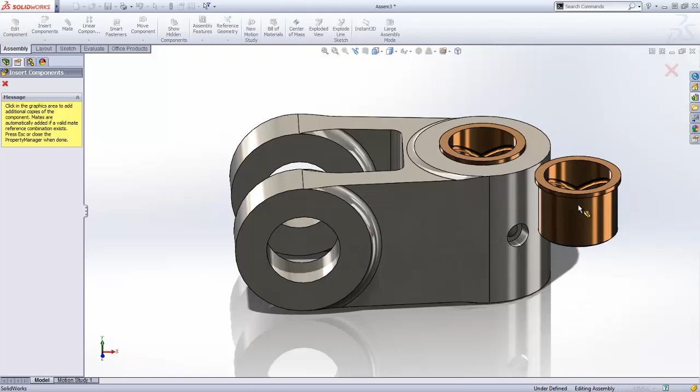We'll start by leveraging our design library to select a flange bushing and drag and drop it into this assembly. As it's dragged over the hole, it automatically seats itself in the hole through the use of smart mates, and we'll add another bushing at the bottom as well.

Notice that there's a star on these bushings. This indicates that this is a smart component and contains smart features. Clicking the star inserts these smart features, as you can tell by the dimensions displayed on the screen.

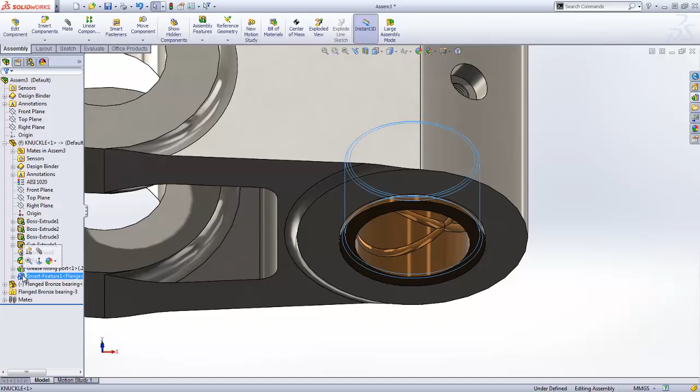If we take a closer look, we can see that these features were actually added to the knuckle part to which it was assembled. We can dig deeper by using the section tool and see that the bore, fillet, and chamfer were added to our part. Let's add the smart features for the other bushing, and just like that, we've defined the proper bore for the bushing.

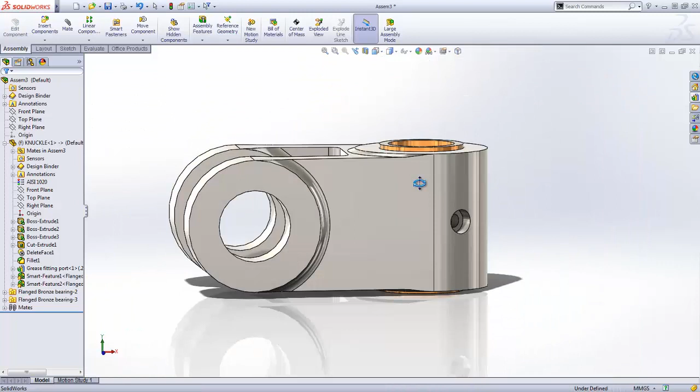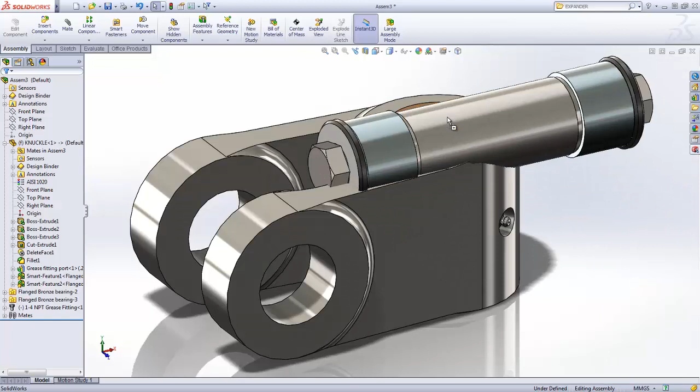Next, we can add the grease fitting by snapping it into position as well. We need to add a pin to our assembly. For models that are not in our design library, we can leverage SolidWorks Search to find items anywhere on your computer. We are presented with all the models with expander in their name or description, and drag and drop the proper model into our assembly.

This expander pin was created in two sizes. For this location, we'll choose the 225mm length pin. SolidWorks automatically places the pin and asks us to verify that we want a concentric mate. The pin is positioned properly in the hole, but we can still move it up and down.

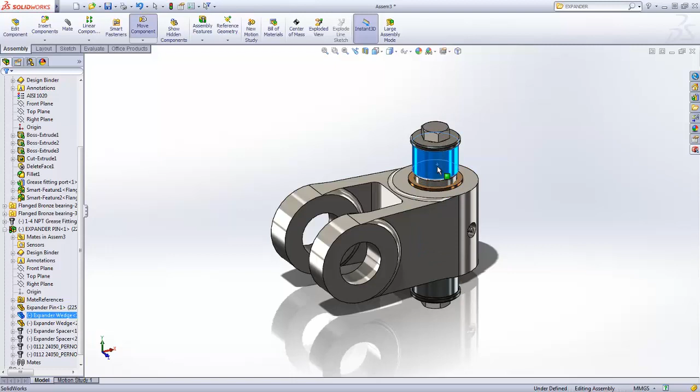Now we could measure this pin and do some math to position it with a distance mate, but a better way is to let SolidWorks do this with the width mate. This advanced mate takes the selected faces and centers them to each other. That was easy, and I didn't even have to get out my calculator.

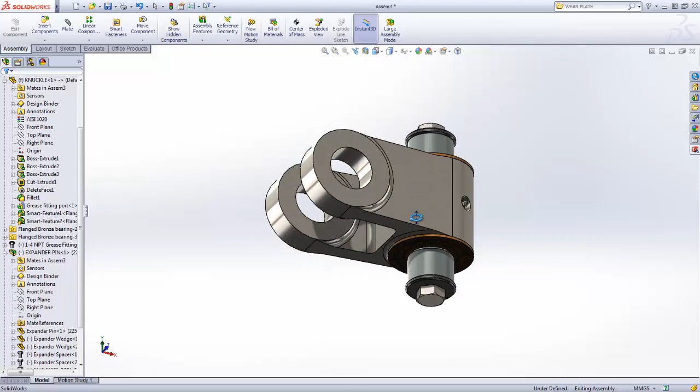Next, we'll leverage SolidWorks Search and place a wear plate at the top of the knuckle. Adding another to the bottom is as easy as holding the control key and dragging and dropping a copy of the wear plate from the top to the bottom. A pin needs to be added to the holes on the left as well, so I'll just drag and drop this one from the feature manager and snap it into position with a concentric mate.

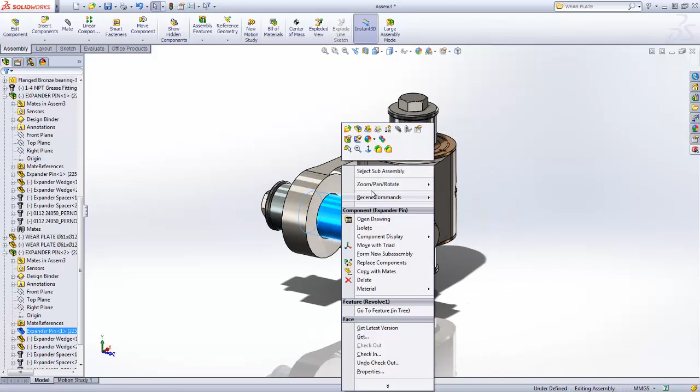Using the width mate again, we can center this one in no time at all. But this pin is too long for this application, so we'll leverage the configuration of the pin assembly and use the 150mm version, and our assembly is complete.

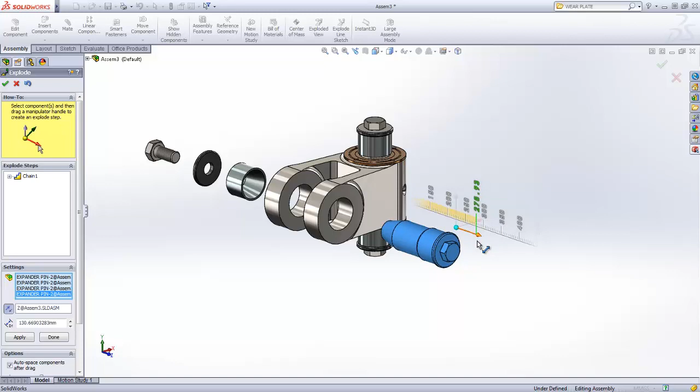Now a great way to communicate how an assembly goes together is with an exploded view, and this is simple with SolidWorks. Let's grab these three components and just drag them out. SolidWorks automatically spaces them, saving me the time of having to do them individually. We'll do the same on the other side, this time selecting the pin as well.

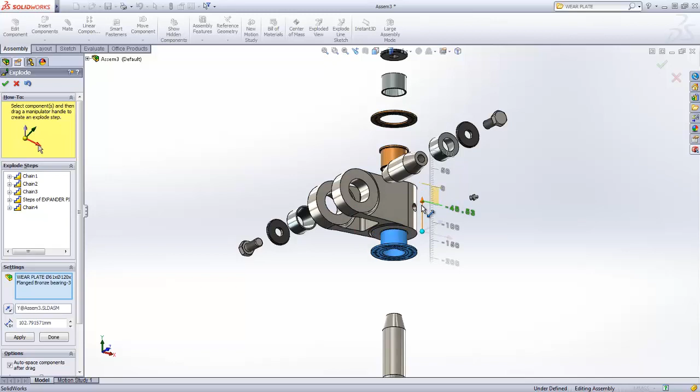Let's explode the grease fitting, but this time we'll reposition the triad to line up with its own axis. If a subassembly already has explode information, we can leverage these explode steps to save time. Finally, let's explode the wear plates and bushings using the same technique. That looks pretty good. Now we'll save the assembly and make an assembly drawing.